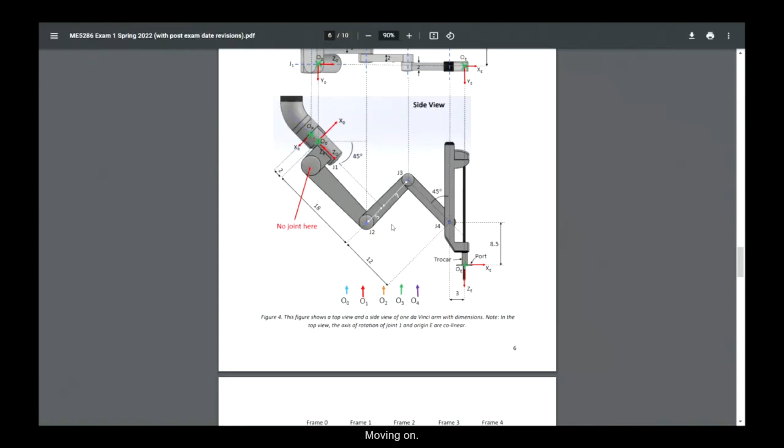Moving on. Like Professor Donath said, there was a bit of communication error, so we apologize for that. But like he also said, no one was punished with their grades for that. We made sure that if you showed understanding of how to place origins, how to do the DH table, and how to write your A matrices, that you didn't lose any extra points, and you're actually given points for our mistake.

So anyway, the main difference here, if you remember this figure from the exam, there were only 3 origins for you to place, O1, O2, and O3. In order to actually solve this problem correctly, you had to have an origin 4, which some students brought up during the exam. The reason we didn't include an origin 4 initially is because we're not considering a joint at the end effector, so really there shouldn't be a need for another origin. However, we need to get the z coordinate aligned with the z coordinate at the end effector, and the first solution with only 3 origins didn't have the z aligned. So really, to solve the problem the right way and get the right transformation matrix, we had to include another origin. That was the big mistake on our part.

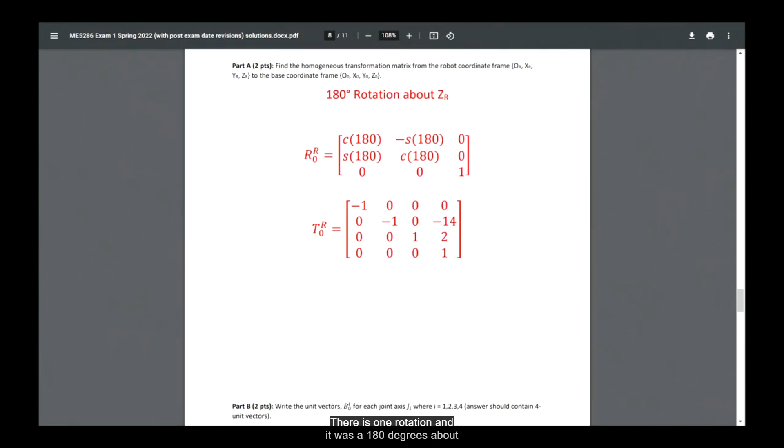So if we're going to switch to the solutions here for a second, there was one rotation, and it was 180 degrees about z sub r, my mistake. Using this view, we can see that zr and z sub 0 are pointing in the same direction, they're parallel. And to get that y sub r aligned with y sub 0, it's just a 180 degree rotation about z sub r. So pretty simple right-hand rule to figure that out.

That's where this 180 degree rotation comes from. And then this R matrix, this rotation matrix, is for rotations about z. So just plug in 180 degrees and you get the first 3 by 3.

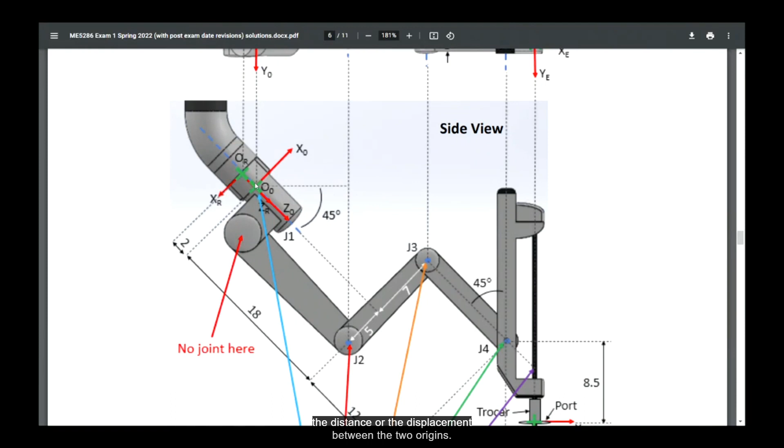And then the position vector. So we have a 0 degree or 0 translation from xr, negative 14 from yr, and 2 from z sub r. So again, going back to the diagram, we can see that if we zoom in here, that's a little blurry, but x sub r is normal to the distance or the displacement between the two origins, so there's no translation in x.

If we look at the top view, there's a 14-inch displacement between OR and O sub 0, but since Y sub R is pointing away from origin 0, it's a negative 14. And then lastly, if we go back to the side view, Z sub R is pointing directly towards O sub 0 along that joint, and this distance is 2, so the translation in Z sub R is positive 2. And that is where this position vector came from.

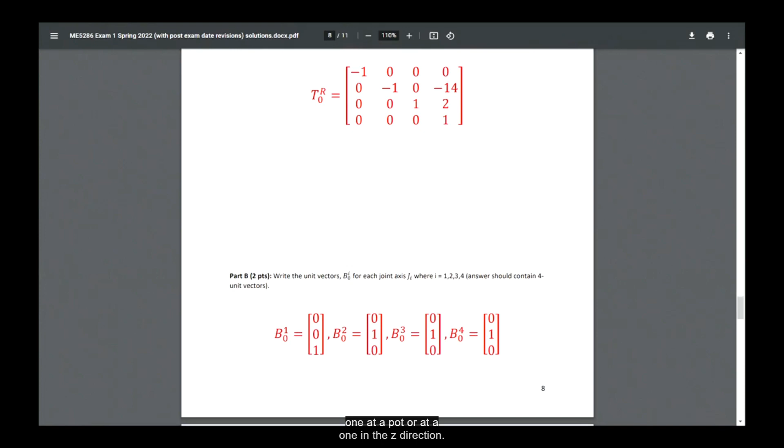Moving on, most people got part A and part B right. Part B was the unit vectors. This was pretty simple. The unit vector to joint 1 had a 1 in the z direction. We can see that from coordinate frame 0, z sub 0 is in the direction of joint 1, so z is positive 1 for that unit vector. Joints 2, 3, and 4 are all normal to the page, which is the y sub 0 direction, so all the unit vectors to joints 2, 3, and 4 are just positive 1 for y. Does that make sense?

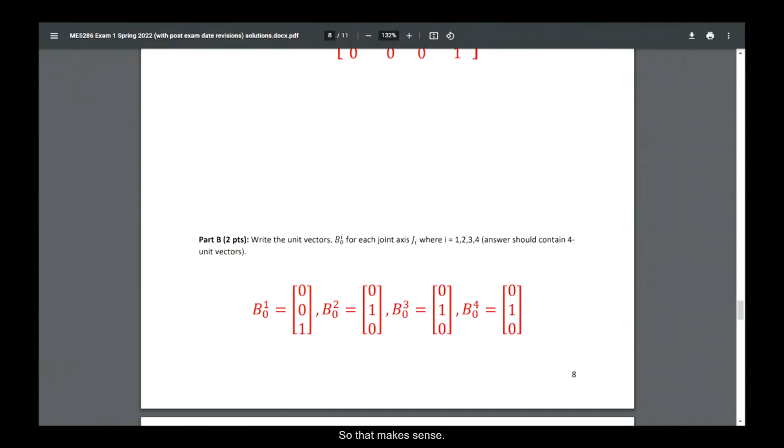Part C is where some of the confusion started for some students. This is where we have to place origins, and actually up through origin 3 it should have been pretty simple. So here's a solution. Origin 0 is already placed, just to give you guys a freebie there.

We know origin 1 had to fall along joint 2, the axis of rotation of joint 2. That's the first rule. In the side view, it has to be at this point because joint 2 is normal to the page. In the top view, origin 1 again falls along joint 2 and has to line up with origin 0, along this dashed horizontal line, which is where pretty much all the origins fell.

Origin 2 and origin 3 are the same story as origin 1. They fall on joints that are normal to the page, so in the side view they're right on the joint axis, and in the top view they all have to line up with each other. So O3, O2, O1 all lie on this dashed line. For the exam you took, that's as far as you have to go for placing origins.

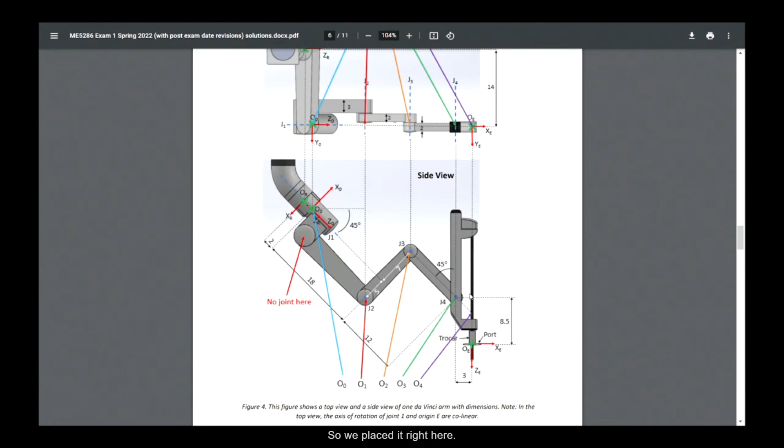But in order to get the true correct answer, we added an origin 4. In the top view, origin 4 had to line up with origin 3, somewhere on this dashed line. Then it had to be in line with the z direction, which has to match the z direction of origin E, so it has to be along this vertical line representing the instrument shaft. So we placed it right here, which would place it right above the origin E on the top view as well.

Again, you did not have to do that on the exam. If you tried placing an origin 4, you were given full points. As long as you got through origin 3 correctly, you were given full points.

The other part of this question was finding the coordinate frames. You were given coordinate frame 0 and coordinate frame R, so we'll start with coordinate frame 1. We know that z sub 1 has to fall along the axis of rotation of joint 2, because origin 1 is at joint 2. Since joint 2 is normal to the page, z1 is normal to the page. So these arrows are just going to be either x or y.

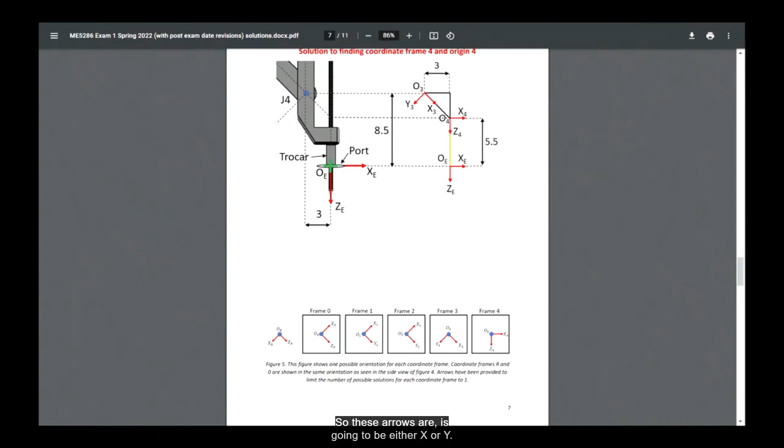y1 has to be parallel to joint 1 - that's another rule. In this view, joint 1 is at this 45-degree angle from the horizontal, which means y1 is also going to be in that same direction, which is where we get y1 here. Since we have z and y, we can just find x. That's how I solved that one. Any questions so far?

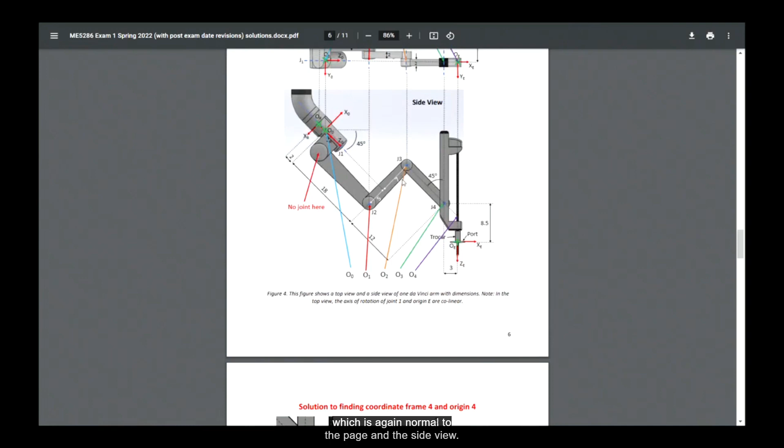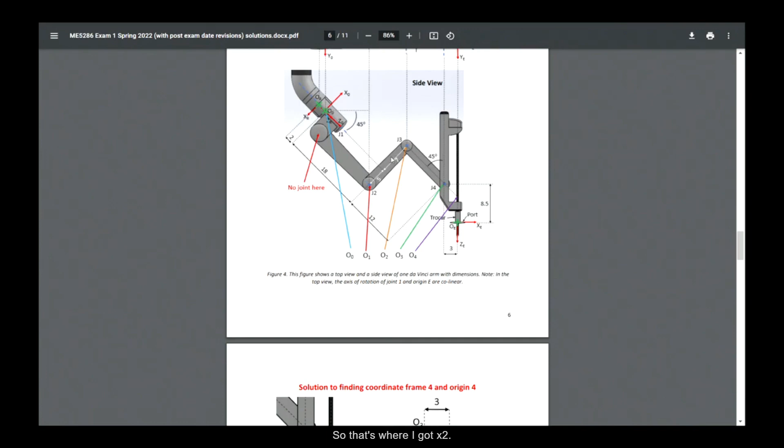For origin 2, it's pretty much the same thing. z2 has to fall along the axis of rotation of joint 3, which again is normal to the page in the side view. This is one of those situations where y2 can't be normal to j2 - I went over this in the review slides. One of the rules when this happens is that x2 has to be in a direction that connects the previous origin and the new origin. So origin 1 and origin 2, x2 has to be in some direction along this line - that's where I got x2. So in this situation, you solve for z and x first, and then place y based on those.

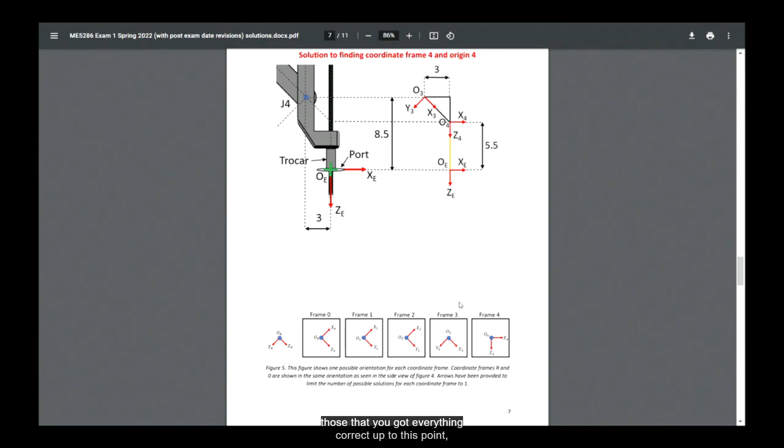For coordinate frame 3, we have origin 3 along joint 4's axis of rotation. This is a similar situation where x has to connect joint or origin 2 and origin 3. So if you can see my cursor, it has to fall along this dashed line, which is where x3 comes in. And since we know z3 is into or out of the page, we can use the right-hand rule to find y3. If you got all of those correct up to this point, you were given full credit for this question.

I'm just going to go through how Professor Donath and I solved for coordinate frame 4. This diagram is how we did it. I placed coordinate frame 3 here, offset so it's a little more clear. Coordinate frame 3 is placed at joint 4, and we know that the z direction of coordinate frame 4 is going to have to line up with the z direction of coordinate frame E. So we know that origin 4 has to fall along this vertical line to fall in line with origin E.

Based on that, let's see, we wanted this final translation between 4 and E to be just a D in the DH table. So X4 and XE line up as well. And then Y4 is just going to be, what would that be, out of the page. Same with Y sub E. Placing it here gave us the correct transformation matrix later on in the exam.

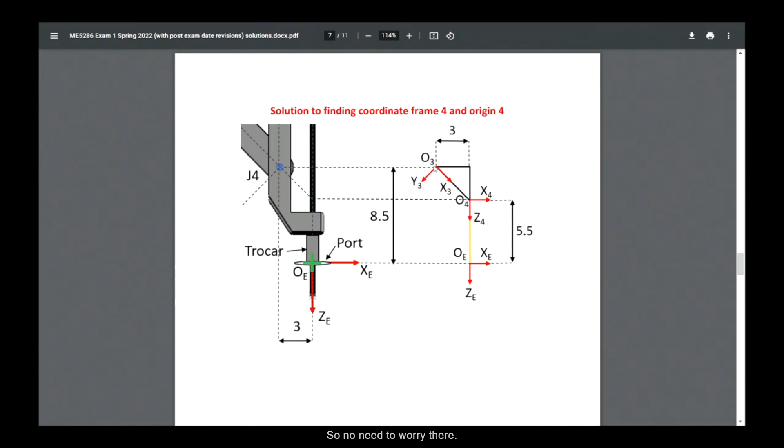All right, we'll continue on. So we're through part C. Part D was the DH table, and again, a lot of students had a different answer for joint 4, but if you showed you knew how to do the DH table through joint 3, you were given full credit. We added another row here, which obviously was not there in the exam, but you need this extra row because we added an origin 4.

Okay, so I will run through how we solved for the DH table. Joint 1, we start with theta 1, which is the rotation about z sub 0 to move from coordinate frame 0 to coordinate frame 1. There is no rotation about z. Let's go back. Again, moving from this coordinate frame 0 to coordinate frame 1, there was no rotation about z.

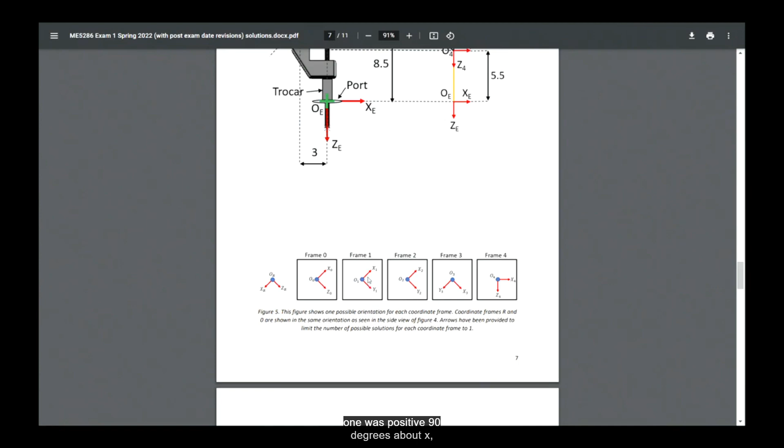We had a positive 90-degree rotation about x sub 0. So if you do the right-hand rule, that will get y sub 1 pointing down like it is here. So the only rotation for joint 1 was positive 90 degrees about x, which is the alpha value.

And then to find D and A, D sub 1 is the distance. The way I solve it is the distance in the y sub 1 direction from origin 0 to origin 1. Y sub 1 is pointing down and to the right. If we go back to the diagram with the dimensions, y sub 1 would be pointing down and to the right, and the distance in that direction from origin 0 to origin 1 is this positive 18.

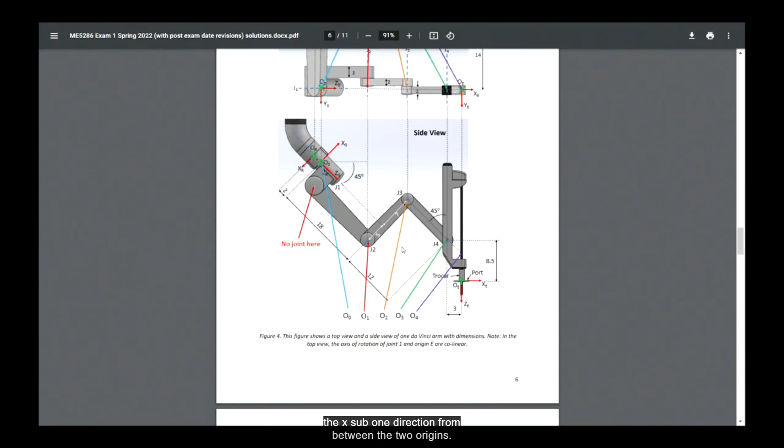And then a sub 1 is the distance in the x sub 1 direction between the two origins. If we go back to the coordinate frames, x sub 1 is pointing up and to the left, or up and to the right. This distance is 5. But since we're looking at moving from origin 0 to origin 1, this value is actually going to be negative 5 because x sub 1 is pointing back towards origin 0. So D and A are going to be positive 18 and then negative 5.

Anybody got questions on that? Okay.

For joint 2, theta sub 2 is the rotation about z sub 1 to get from origin 1 to origin 2. As you can see, the coordinate frames are set up the exact same. So there's not going to be a rotation about z or x. So theta and alpha are both 0.

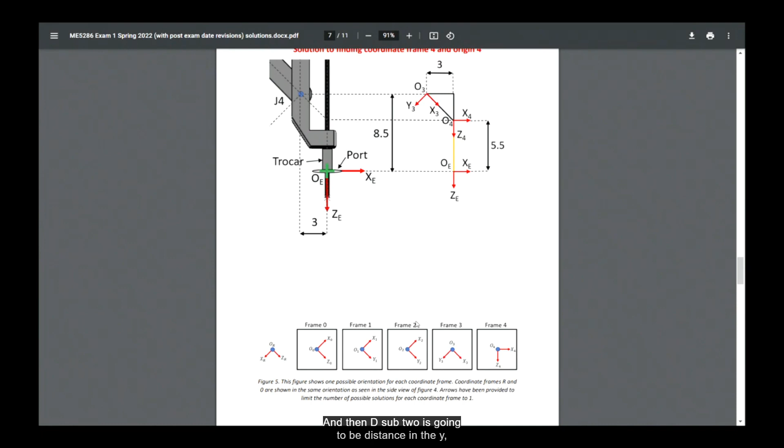And then d sub 2 is going to be the distance in the y2 direction from origin 1 to origin 2. If we go back to the solution, origin 1 is here, origin 2 is here, and y2 is pointing down and to the right. So there's actually no distance along y sub 2. That's why d2 is 0.

And the x2 is pointing up and to the right. Since a sub 2 is the distance in the x2 direction from origin 1 to origin 2, that's going to be positive 12. So it's 0, 0, 0, and 12.

For joint 3, theta is the rotation about z2. Z is into the page for both frame 2 and frame 3. Since frame 3 has a slightly different orientation than frame 2, but x and y are still in the plane, we know there's a rotation about z. A positive 90 degree counterclockwise rotation about z2 lines up x2 with x3 and y2 with y3. So theta 3 is 90, and there's no rotation about x, so alpha 3 is 0.

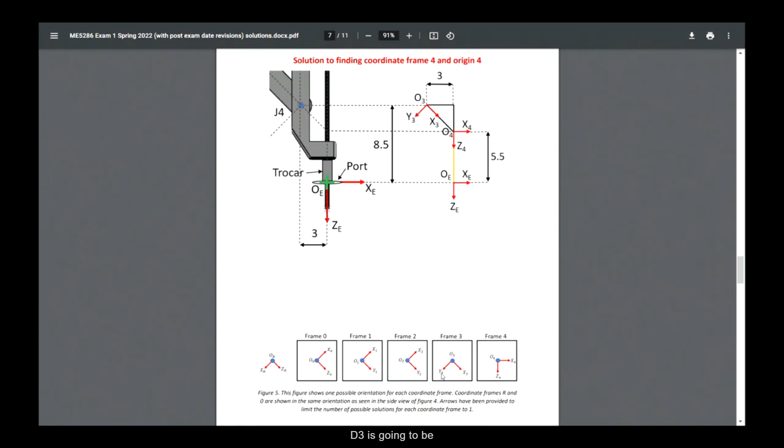D3 is the distance in the y3 direction from origin 2 to origin 3. Going back to the diagram, y sub 3 is pointing down and to the left, and that's normal to the displacement between origin 2 and origin 3. So D sub 3 is 0.

X sub 3 is pointing down and to the right, and A sub 3 is the distance in that direction from origin 2 to origin 3, which is a positive 12, as seen here. So we have a 90 degree rotation for theta, 0 for alpha, no d, and 12 inches for joint 3.

To reiterate, if you showed you knew how to do the DH table and got joints 1, 2, and 3 correct, you were given full points for joint 4, no matter what you put.

We're still going to solve for joint 4. The way we solve it: we have y sub 3, x sub 3, and then we need to get z sub 4 in the plane, so we know there's going to be a non-zero alpha.

The first step is solving for theta, which is the rotation about z sub 3, into the page here. The goal of this rotation is to get x sub 3 and x sub 4 parallel, so we have to rotate 45 degrees to get x sub 3 along the horizontal.

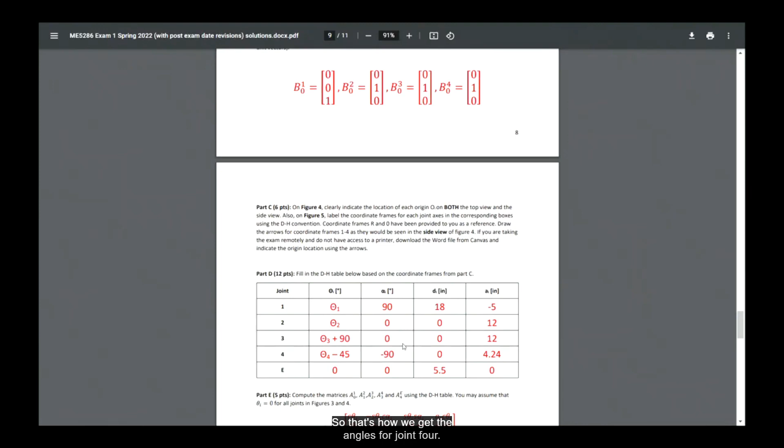For D4, there is no distance between origin 3 and origin 4 along y4, because y4 is now coming out of the page and they're collinear in the plane. So D4 is 0.

A4, since there's a 45 degree offset here, we're finding the hypotenuse of this triangle, and that's just 4.24 inches.

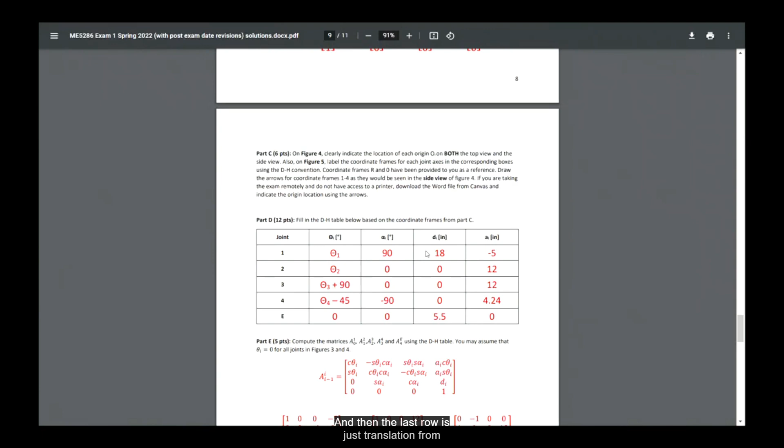The last row is just translation from joint 4 to joint E, or origin 4 to origin E. Since the coordinate frames are now lined up, there's just a 5.5 inch translation, and that's the D value. So that's how we solve the DH table.

Everyone's going to have a different answer for joint 4 most likely, because there was some confusion. But if you showed you knew how to do it from joints 1, 2, and 3, you were given the points for joint 4. We wanted to make sure no one was punished for our mistake.

This new exam, since there's another row of the DH table, we added a matrix to find. This is pretty simple, just plug and chug from the DH table.

There were a few examples where students got wrong answers in the DH table but still found the A matrices correctly based on their DH table values. You were given half credit for knowing the correct method, but you lost some points for having the wrong DH table.

Anyway, it's just plug and chug, no need to really go over how we got it. As long as you did the correct method, which is this matrix right here, you likely got full points.

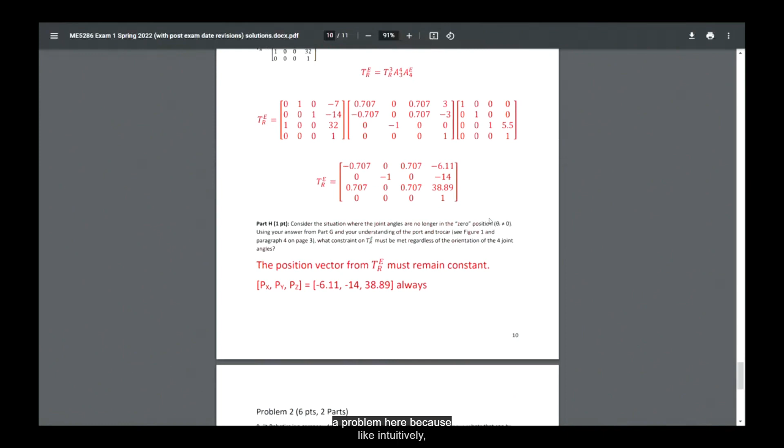One way to check—a few students actually brought this up during the exam—when they solved this transformation matrix, they got a y that was not negative 14. If we go back to the diagram on this top view, since all of these origins are in line, we know that the position vector, or the distance in y sub r to the end effector, has to be negative 14. So a few students brought that up, and that's what tipped me off that there might have been a problem here, because intuitively this has to be negative 14 just based on the schematic.

Obviously these x and y values are a little more difficult to solve since there's some geometry involved, but since there's a negative 14 here, that should tell us this is likely the correct transformation matrix. To reiterate, if you showed the correct multiplication sequence, you're awarded full credit for this part.

The last part of problem 1 tested your understanding of the robot, making sure you were reading about it in our description. So if we're considering a situation where the joint angles are non-zero, meaning this schematic looks different—let's say there could be joint 2, joint 3, and joint 4 at a different angle—the question is asking, what about this transformation matrix has to stay the same?

And the position vector cannot change. That's because, if you remember the robot, the trocar is where the end effector is, and that is stationary in the port, which is essentially the incision in the patient. We're considering that like a spherical joint about the port, so it can twist all sorts of ways, but it cannot translate anywhere, because in a surgery that would rip the patient's skin or do some sort of damage.

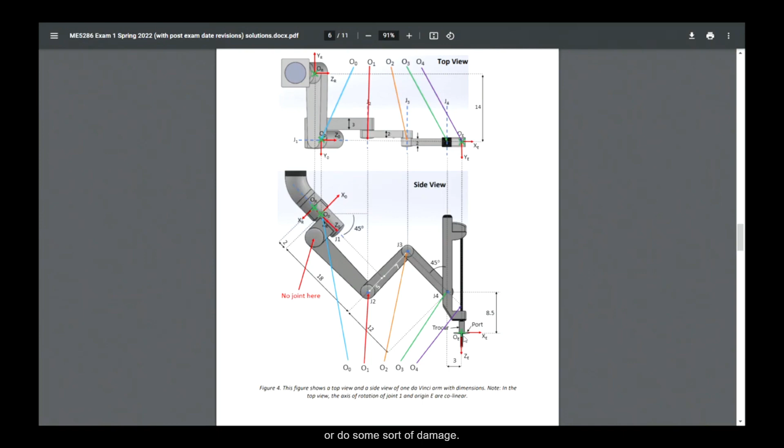So we were looking for something about the position vector. There were a lot of students that said the Z had to stay the same. If you were one of those students, you were given partial credit, but really the entire vector itself can't change no matter what joint angles you have. Is that clear?

So if we didn't have the negative 6.11 or whatever, it's fine as long as we said it was like px, py—yeah, you got full points for that. If you said position vector, if you said px, py, pz, if you put your values but they didn't match up with what I had, it didn't matter. You still got full points.

Well, matrix multiplication for part G—if you had the right sequence, you got full points. If you did a coordinate frame wrong, it cost you a little bit. You still got some credit for doing the correct method, as in the DH table and the A matrices. Does that make sense? Yeah.

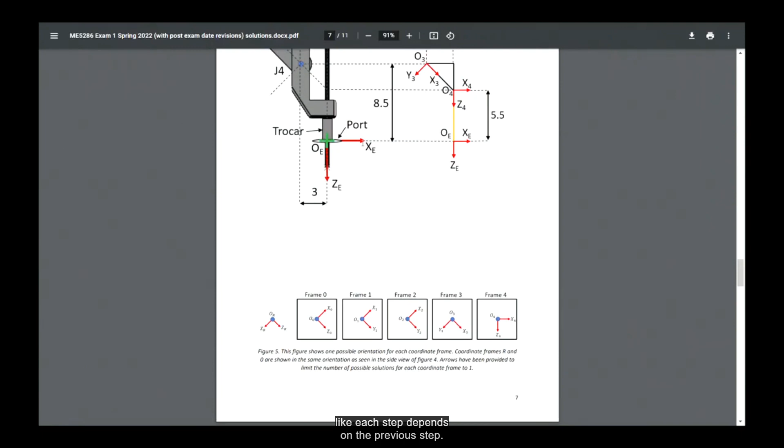Okay, so I get that this is kind of step-by-step, each step depends on the previous step. So if you placed origins wrong, that's going to affect everything. If you do wrong coordinate frames, it's going to affect things. But we tried giving partial credit for your method. Make sense? Yeah. And if you go through your exam and you have an issue with it, just let me know, and I'll try and work that out.

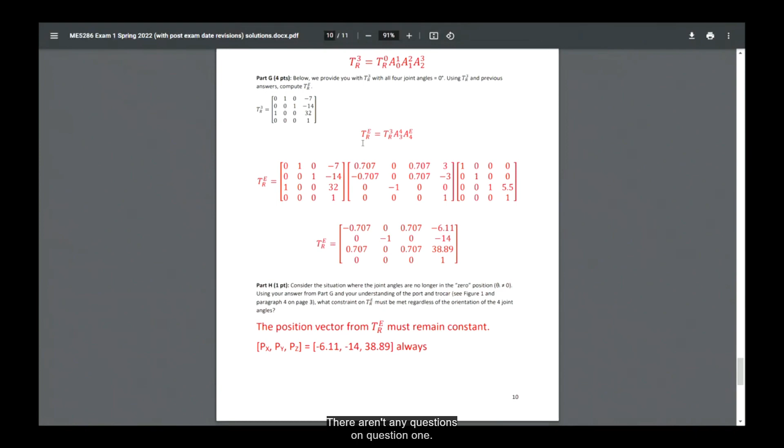If there aren't any questions on question 1, we'll move on to problem 2. This was just roll, pitch, yaw, multiple conventions. There were a bunch of right answers I saw for part A. Most people got this question completely right. I just listed 3 solutions I saw in the exam that gave the right orientation of the coordinate frame 4 here.

For part B, there are 2 possible situations given here. Some students did an XYZ rotation, and some did a ZYX rotation, both of which were fine and correct. I just listed 2 ZYX rotations here that are correct.

Anyone have any questions about the roll, pitch, yaw? It seems like the class was pretty clear on this concept, which is good to see.

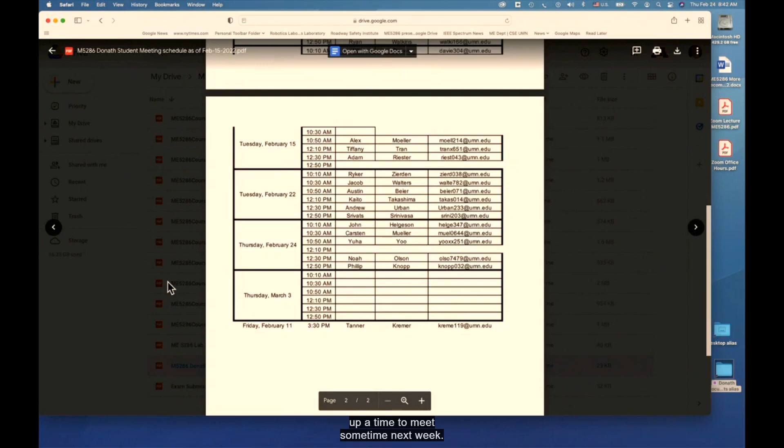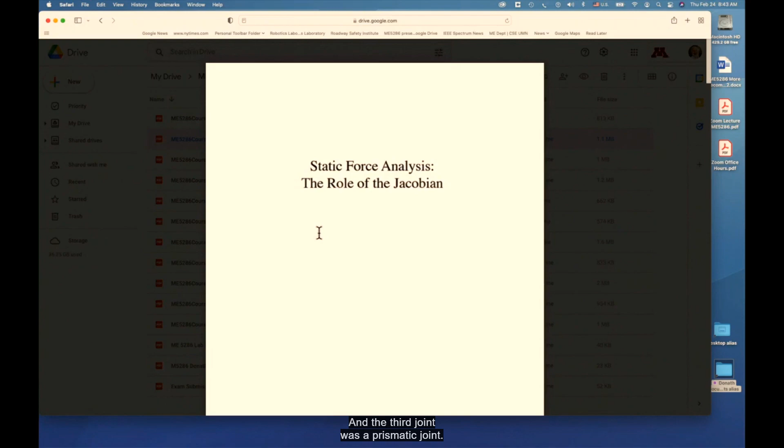Last week we talked about computing the Jacobian. I went through this in great detail on a 3-jointed machine, where the first 2 joints were revolutes and the 3rd joint was a prismatic joint. We went through the analysis, all the vectors, unit vectors, and cross products, in order to get the final result, which was a 6x3 Jacobian.

So the question always is, is that the only application of the Jacobian? Jacobians have an application that essentially leads to the capability of calculating 2 things. Either you know what the joint velocities are, and then you can compute what the final velocity of the end effector is - think of that as not that different from the forward kinematic solutions, but it's what we'd call the differential form.

The other option is to do the inverse kinematics. What happens if I have a specified velocity at the end effector, and I want to calculate what the joint velocities need to be? To do that, you have to look at the inverse of the Jacobian. But there are other applications, and the other application we're going to talk about is looking at the forces.

What I mean by that is if I have a robot, and now we're talking about a robot that makes contact with the world - I'm doing stuff, I've got a pen, and I'm actually making contact with the world, there's going to be forces that push back. There are reaction forces over here. What is the propagation of these reaction forces to the individual joints?

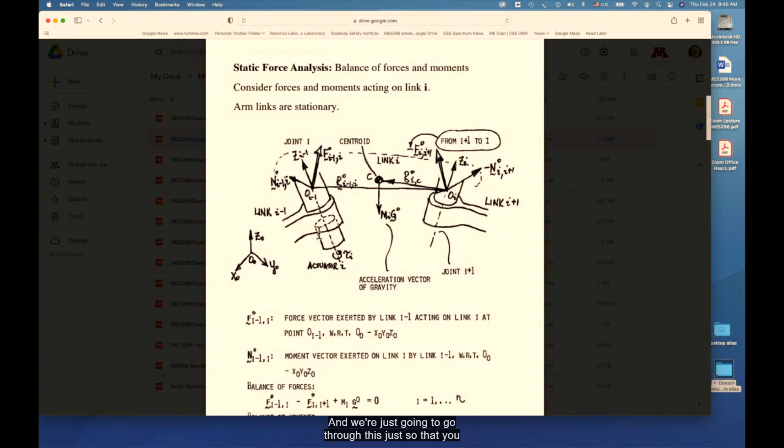So what I'm going to first do is show you the complicated way of doing this. We're just going to go through this so you understand the actual complications if you had to actually solve for everything you need to. I'm doing this so you get the big picture, and then I'm going to show you there is a very simple, straightforward way of doing the analysis and figuring out the relationship.

Don't get frightened by what you see here, but I just want you to see what all the components are if you were really going to do a sum of forces, sum of moments, and calculate all the reactions. So if I have an actuator - here's an actuator, think of this maybe as a motor that's applying a torque, and it's applying a torque to joint I. Remember, when we're talking about joint I, it's about z sub I minus 1.

So there's z sub I minus 1, and then we have this link I, which I'm not drawing, because if I drew the link it would cover up all the vectors I'm showing you. Just assume there's a link I that connects this joint with the next joint. If this is z sub I minus 1, the next one is z sub I, and this link over here is link I plus 1. So here we have link I minus 1, here's link I, and here's link I plus 1. This is joint I, and this is basically joint I plus 1.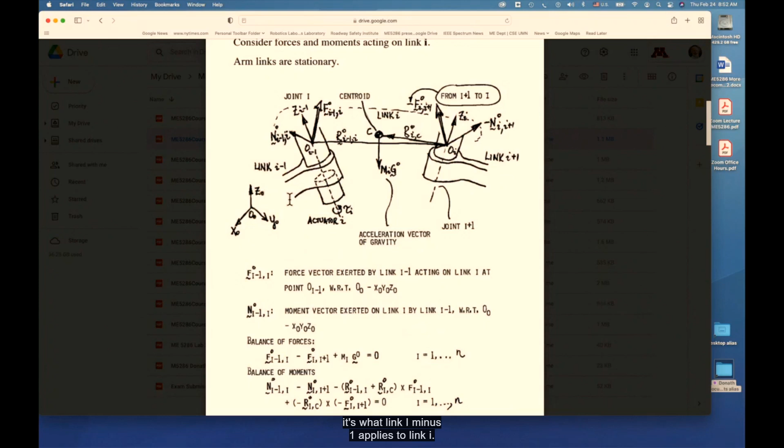So these are the forces: a component in X, a component in Y, and a component in Z. And there are also going to be moments. As soon as we start dealing with moments, that moment vector also has 3 components. In this particular case, it's what link I minus 1 applies to link I. So these are the terms here, N, and again, this is a 3 by 1, and this is a 3 by 1.

If we do a balance of forces and a balance of moments—take all the forces in the X direction, all the forces in Y, and all in Z, and add them up—we end up with this equation. Let me move this up a bit so you can see these other vectors. Essentially, the reaction forces are the forces applied here, the forces over here, and there is the gravitational force.

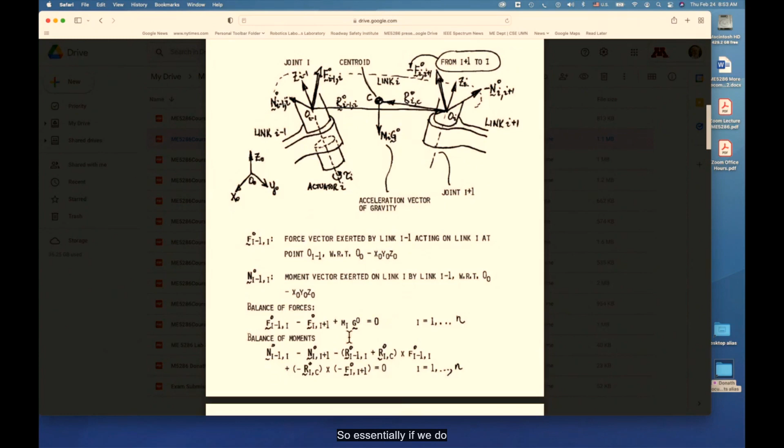So in effect, this is the first equation. Remember, there's no dynamics—we're talking about static conditions, so there's no motion going on. So if we do free body diagrams and sum the forces, we're going to get this equation.

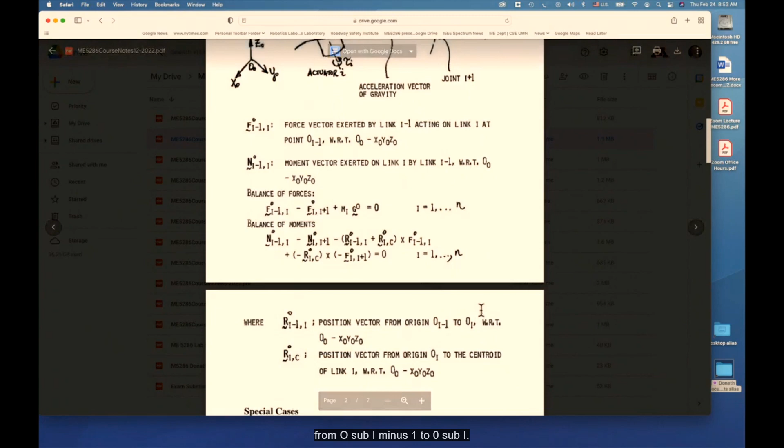If we then do the sum of the moments, there are moments here and here, but we cannot forget that there are also position vectors which take us from the origin up here. This vector r sub I minus 1, I, connects O sub I minus 1 to O sub I. So this is the position vector from O sub I minus 1 to O sub I, from here to here. That isn't a big deal to determine for any particular robot.

But there is also this other position vector which takes us from origin I over here to the centroid itself. Again, that's a position vector, and it plays a role because this is pretty straightforward.

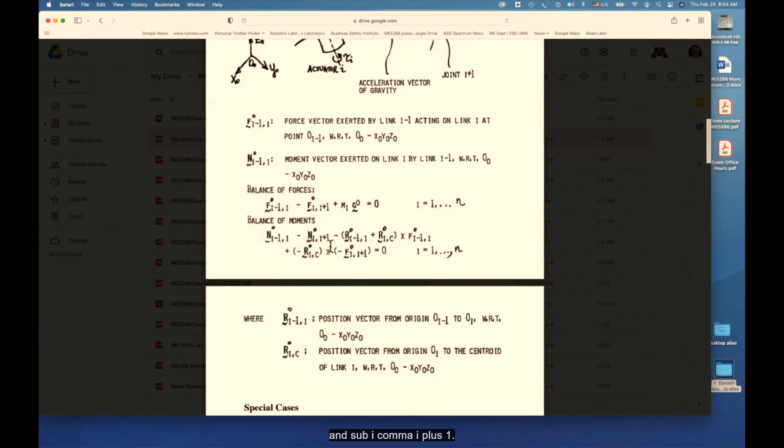You take n sub I minus 1, comma I, subtract off n sub I, comma I plus 1, but then you also need the fact that when you take this vector and this vector and add the two, you basically get a vector from O sub I minus 1 to this position, to the position of the centroid. That's what this is basically saying.

You have to do the cross product of that vector with essentially the f sub I minus 1, which is this one here. Remember, we're taking the sum of moments about the centroid. So essentially, you have the vector that connects this point to this point, and you have to take into account the cross product between that and the force. That's what this term over here is. That gives us another moment that's applied here.

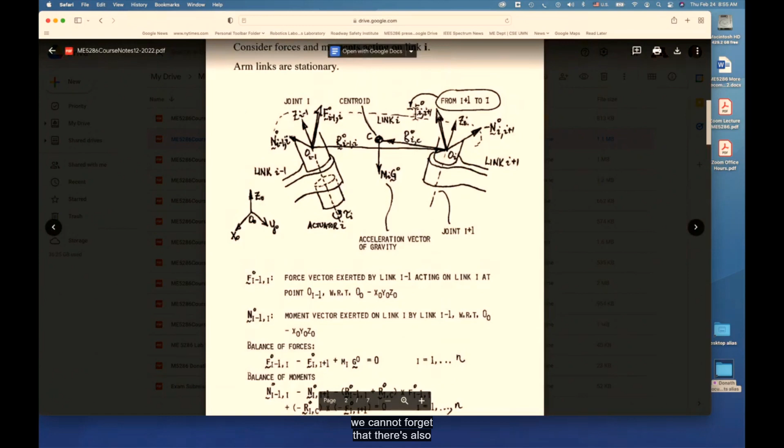And last but not least, to get a total balance, we cannot forget that there's also this force vector over here acting on here. Essentially, this force is what link I plus 1 is applying to link I. Notice the minus sign, because it's applying reaction forces on link I. We can't ignore it, so it shows up here, and it is basically a cross product as well. We have to take all this together.

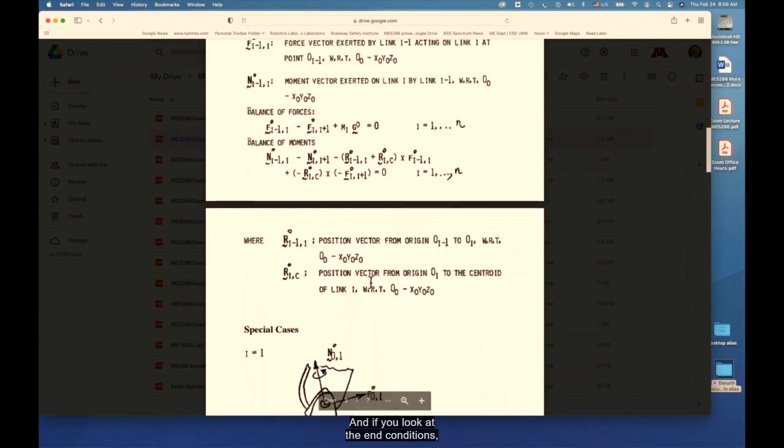And if you look at the end conditions, the base of the robot, there are going to be some forces and torques, reaction forces at the base of the robot. You might put it on an instrumented platform and then measure those, for example.

And then you have the end effector, which may be holding something. This might be a contact probe that you're pushing into the wall, for example, or it might be a piece of chalk scratching across a blackboard. It's doing some activity where you're interacting with the world, and so there's going to be a force and torque applied by the outside world back on the robot itself.

We're going to take a look at some examples later on. I'll take you to some websites, but there are companies whose mission is to control exactly what the forces and torques are as you apply to a surface. Typically, grinding is such an application. There is robot-controlled grinding of surfaces, polishing of surfaces. There are many activities where you actually have to apply forces in a controlled manner to a surface.

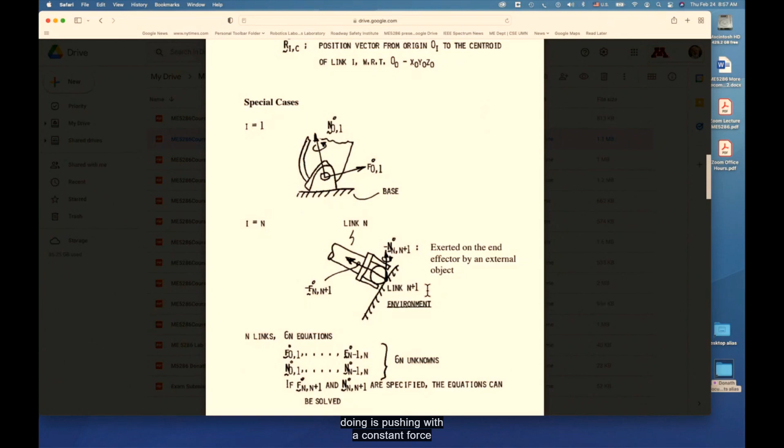And what you might be doing is pushing with a constant force against the surface here and not applying any force in that direction, again depending upon what the objective is with your tool.

Well, if we take all of this together, take all these equations, spell everything out and write it out, we're going to get an unbelievable amount of equations. Because remember, if we just look at the forces, if there are n joints, we're going to end up with 3n unknowns just from the forces, and then we add the moments, we get another 3n unknowns. Together, we have 6 times the number of joint unknowns that we're trying to solve.

And it can be solved, but it's a very tedious process. You just don't want to bother to do all that, because remember, some simple things like how do you determine exactly where the centroid is inside each link? That's an awfully tedious task to do, and I'm not proposing that we do it.

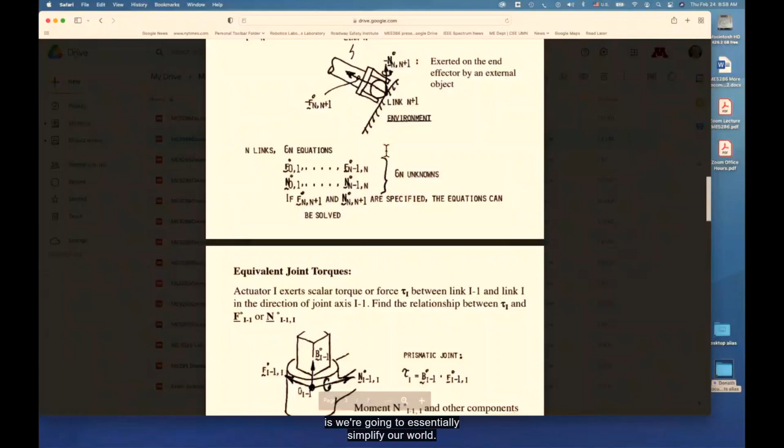So what we're going to look at is simplifying our world, remembering that we have real bearings, we have structures that are designed to limit all these cross-structural effects. And so we're going to find that there's a much simplified way of relating the torques or forces at the joints with the forces and torques at the end effector.

So let's go through this and take a look at a prismatic joint and a revolute joint. This is going to be what you might call a generic joint. When I say a generic joint, assume for a moment that at that joint we're going to have an actuator of some kind, and that actuator might be a prismatic actuator, a hydraulic cylinder that's moving in and out, or it might be a rotational motor. We're going to assume now that there are bearings and structural elements that allow you to ignore all the other reactions that may be applied to that structural joint.

So if we take a look at the relationship, here's a prismatic joint that can only move up and down, okay?

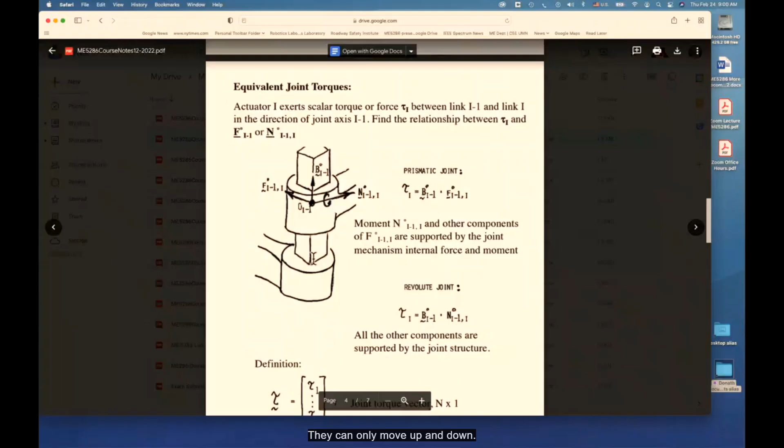We're assuming that you've designed the structure so that any torques applied in other directions are captured by bearings or thrust bearings that take care of those. If we have a unit vector defined along that joint, and the origin of that coordinate frame system, in order to keep this as generic as possible, I'm using tau, but tau can represent either a force or a torque at joint i.

For a prismatic joint, tau sub i is going to be 3 forces: F sub x, F sub y, F sub z. These are forces in directions where B sub i minus 1 is essentially the unit vector along which the prismatic joint is operating. So in effect, this is the force vector that the actuator has to apply to overcome the reaction force vector at this particular joint.

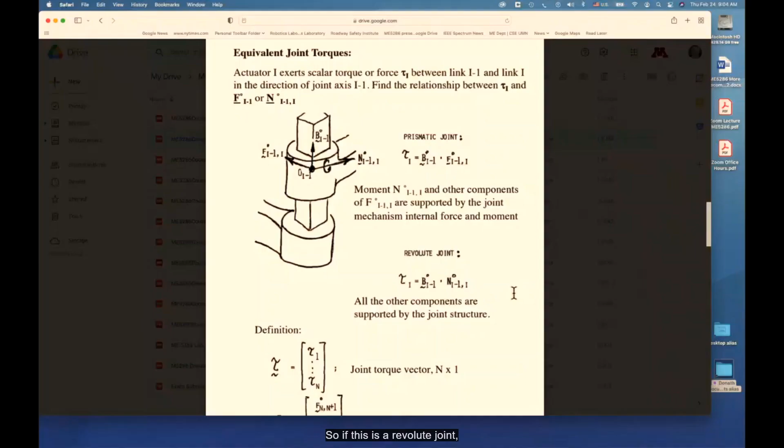So if this is a revolute joint, look at the similarity between this expression and this expression. If it's a revolute joint, dealing with this over here, the reaction tau sub i in this case is a set of 3 moments, and that is essentially what is being applied by my actuator — let's say it's a motor.

If everything is designed properly with your transmissions and everything else, along which axis should that motor be pointing? If we're going to rotate, this is a rotational joint, and b sub i minus 1 is now the normal unit vector telling us which axis we're rotating about. Then the torque applied by that motor, by that actuator, is going to essentially be the dot product of whatever set of moments are acting at that joint.

It's going to be dotted, so to speak, with the unit vector. So in effect, this revolute joint — the motor, the actuator, and the transmission, whatever is being applied at that particular joint — its mission is basically to handle the components of the reaction moments applied at the joint, via the dot product, which gives the components of that moment acting about that particular unit vector. If there are moments not in the right direction as far as the motor is concerned, it does not see them, because the structural elements of the robot, the bearings designed into that robot, pass those down to the ground and are never seen or felt by the motor.

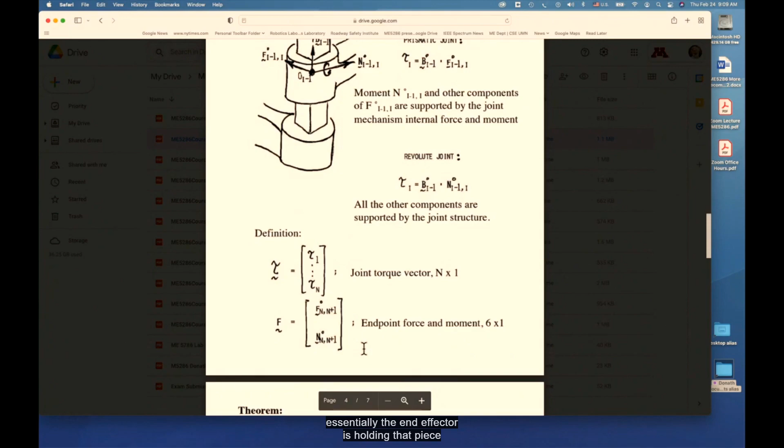By the same token, the endpoint force and moment, this has to be 6. So there's going to be 3 forces here and 3 torques, and that's at the endpoint, where essentially the end effector is holding that piece of chalk and working its way across the chalkboard. Those are the reaction forces that are measured either in a load cell at the end effector or measured by a load cell on the blackboard or some other surface.

So that's the endpoint force and moment. And the whole idea here is to relate these two. How are they related to one another? Can we calculate what those forces and torque reactions are inside the joints, which you need to worry about, because when you size a motor, you don't just size it for dynamics, you need to also size it for static conditions. You need to include both in making any decisions about how big a motor to use to drive a particular machine.

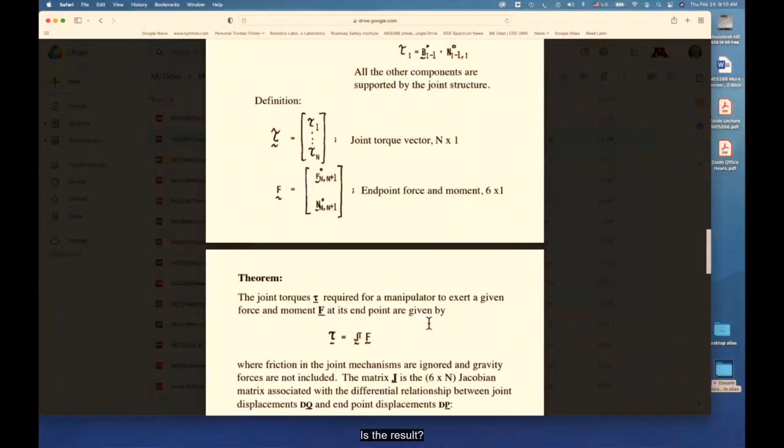So what we're going to look at is the result, and then I'm going to show you how to get this result, that in effect there is a relationship between those sets of torques. Remember, it could be a force too, but essentially if we're talking about a set of joint torques tau, what we're going to show is it's related to the set of endpoint forces, F, by the transpose of the Jacobian. That's a pretty awesome result that makes it very easy. Once you have the Jacobian, calculating the transpose is fairly straightforward. There's no craziness of having to calculate an inverse of a Jacobian. So this is a fairly straightforward analysis.

And this assumes the definition of a Jacobian, which is basically a matrix that relates the set of small differential changes at the end effector, d sub p. Remember, d sub p has 6 components, small changes in x, y, and z at the end effector, and 3 small rotations about x, y, and z. And dq are the small changes at the joints. If we're dealing with 6 joints, there are going to be 6 of these small changes in joints. So what J does, the Jacobian, is relate small displacements at the end effector with small displacements in each of the joints. So how do we get that?

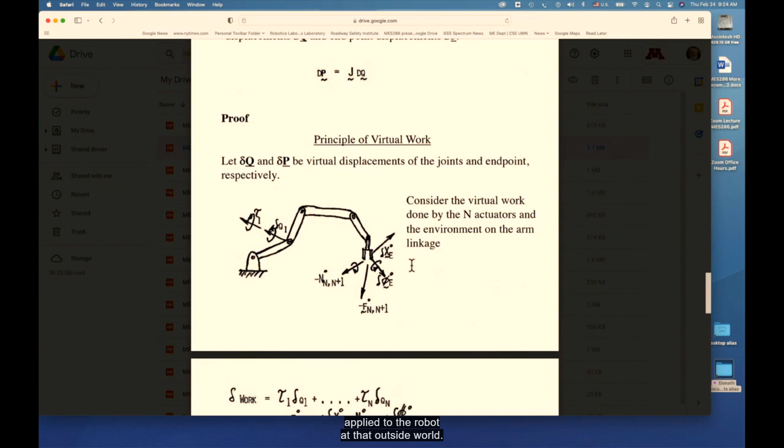So if we now add up all the work going on, at the first joint we're going to have tau 1 times del q1. This is a force or a torque multiplied by a small translation if it's a prismatic joint, or a small rotation. So force times displacement, as I said, is energy or work.

And then we're going to add up the next joint and the next joint and the next joint. At the nth joint, we're going to have the nth actuator apply a force or torque multiplied by the small displacement at that end joint. That's all the energy going into the system, all the work going into the system.

And then some work is to balance all this. We're basically going to say that at the end point, we're going to have a force vector, which is basically the reaction. It's being taken out of the system, so to speak. So this is the force coming out of the system or being absorbed on the outside world, the reaction forces, times del xe. So that's the energy going out.

So these are energies coming in. This is energy going out. And this is work going out. So this is the moment times those small displacements.

We can then combine all this if we take the transpose of a torque vector. Remember, tau is a vector n by 1. And we're going to multiply it by another vector, but this is going to basically be, we take the transpose of a vector that is a column, then becomes a row. The transpose of a column becomes a row. So tau transpose is essentially a row vector multiplied by a column vector. So this is essentially a product.

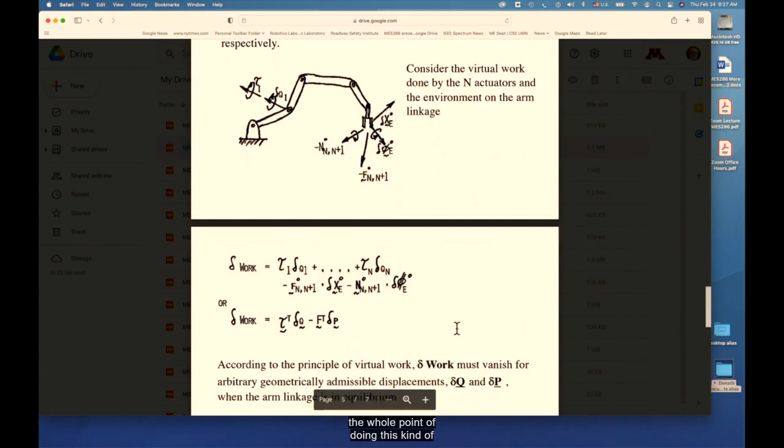Now, the whole point of doing this kind of analysis is if we're talking about any particular geometry, essentially we're talking about really tiny displacements of del q and del p. We're basically going to say there's no real work being done by the system. This del work is equal to 0. Nothing's moving. There really isn't any displacement to speak of in the big picture. Essentially, the robot is making contact with the wall, and then I'm pushing against the wall. There's no work going on.

Now, you might say, I as a human, if I'm doing push-ups, clearly we're doing some work. But just not doing anything and just pushing against the wall, your muscles are actually contracting. There is real work going on inside your muscles, even if you don't see anything of your arm moving along. But the bottom line is, in this analysis, del work is equal to 0.

And when we do that, we are going to see that there's a very neat relationship that comes out of this. If the geometrical constraint is simply del P is equal to the Jacobian times del Q, remember what that means. The Jacobian, by definition, relates small changes at the end effector. Small displacement changes at the end effector are related to small changes at the joints. So del Q is essentially a vector of small displacements at each joint. Del P are small displacements at the end effector.

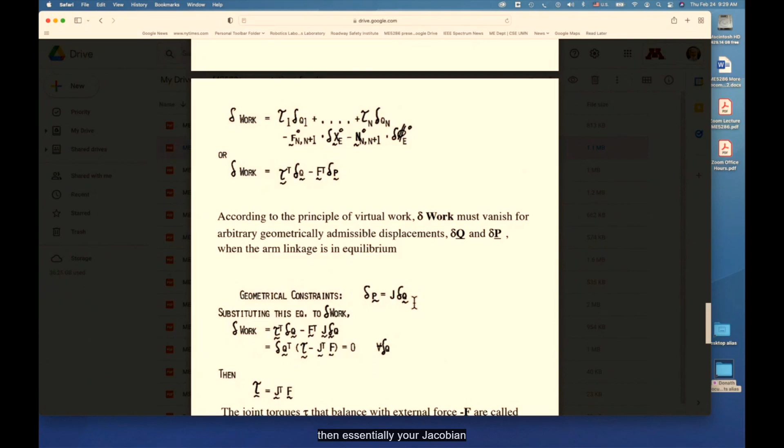If del Q is only 3 elements, then essentially your Jacobian is going to be 6x3. So if we have this geometrical constraint, which is essentially the definition of a Jacobian, then we can do some plugging in. Here is this del work.

I'm just going to take this equation, and now I'm going to substitute into this equation for del P. You see this del P over here that my arrow is pointing to? I'm going to replace del P by J del Q.

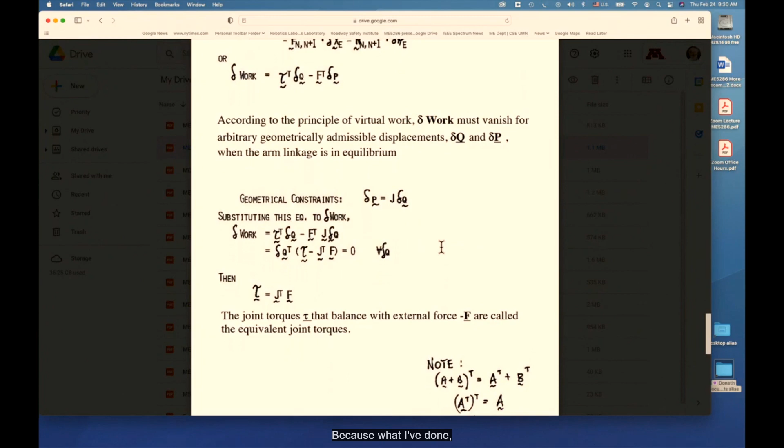And when I do that, I get this equation over here: tau transpose times del Q minus F transpose times J times del Q. I get this result. And now I can play with my transposes a little bit, because what I've done is pulled out some equations for transposes.

If you take the transpose of the sum of two matrices, it's the same as adding up the transposes. If you take the transpose of a transpose, it's the original matrix by itself. And if you take the transpose of a product AB, it's equivalent to reordering B and A, the same as taking the transpose of B times the transpose of A.

This is important because it applies to this analysis, since we've essentially moved del Q to this side. We had to transpose and move it around, taking into account this result. Then we take the transpose of the difference, and again taking this into account, we get this result. So the bottom line is we get this equation.

We're saying delta work is equal to 0. Well, then if del work has to be equal to 0, and this del Q has to exist, be admissible as they say, that means this expression has to be equal to 0. That means tau minus J transpose F has to be equal to 0, and if that's the case, tau is equal to the transpose of the Jacobian times F.

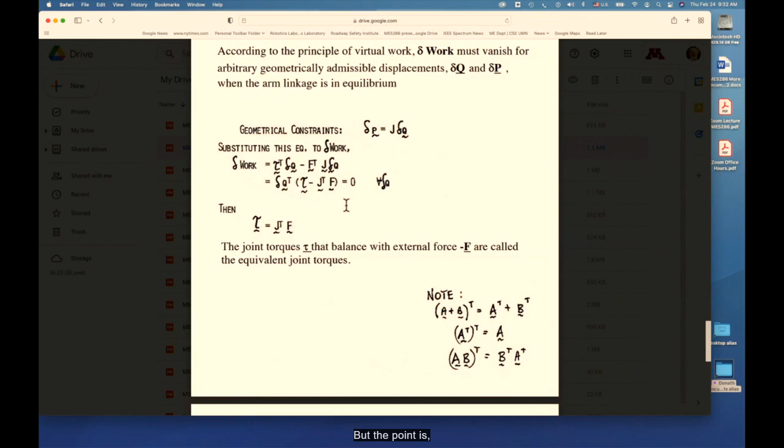But the point is, what's important is to realize that if I have some forces and torques at the end effector, when that end effector is touching the world, touching the wall, touching the table, and doing stuff, there is a static component to all that.

And we can calculate, for static conditions, the reaction forces at the joints as a set of vectors tau. For 5 joints, tau is going to be 5 by 1. For 6 joints, it'll be 6 by 1. And F is always going to be 6 by 1 — there are 3 forces and 3 torques.

And essentially, to figure out what these reaction joint torques have to be, what the motor has to overcome under static conditions, we basically multiply the transpose of the Jacobian times F.

Now, just looking at that and trying to understand this a little bit, what you need to remember is that the Jacobian changes its value depending upon where you are in the workspace. So the Jacobian is always a function of the joint variables.

And because it's a function of joint variables, that's telling you the reaction torques at each joint are going to be different if I'm pushing at the wall here, or pushing at the wall there, or pushing down on the table, because we're going to have a different set of joint values in the same work volume. The origin of my robot is over here.

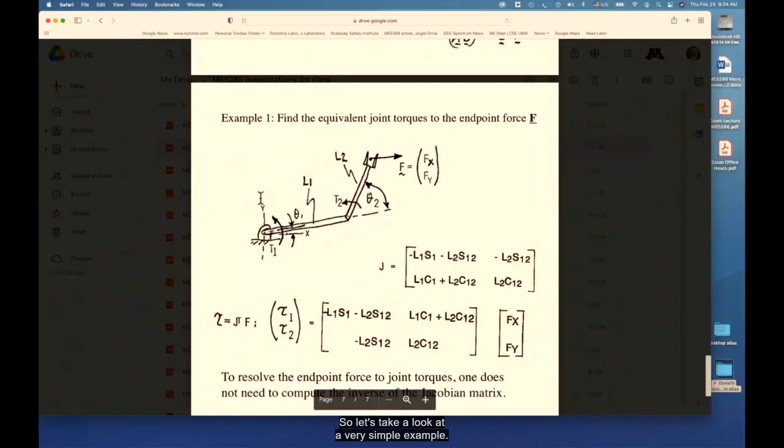So let's take a look at a very simple example that we've looked at before. This is essentially a two-link planar robot, only moving in the plane. Here's theta 1, there's theta 2. There's a torque applied at the first joint, a torque applied at the second joint.

At the end point, before we looked at it being two components, velocity along x, velocity along y. Now we're saying if there is an fx and an fy, if we measure the force in the x direction and the force in the y direction that this robot applies to a surface, can we calculate what the two torques are for a particular set of theta 1 and theta 2?

So we previously went through and I showed you the Jacobian of this two-link thing. By the way, it's in your textbook - if you go back, I give you the exact problem numbers in all three editions of the book. This is what the Jacobian looks like.

Remember, S sub 1,2 is the sine of joint angle 1 and joint angle 2. If this is the Jacobian, the transpose of a Jacobian - remember the diagonals stay exactly the same, we just swap the off-diagonal terms for a 2 by 2. Very simple transpose. So if we take the transpose of this, we get this matrix.

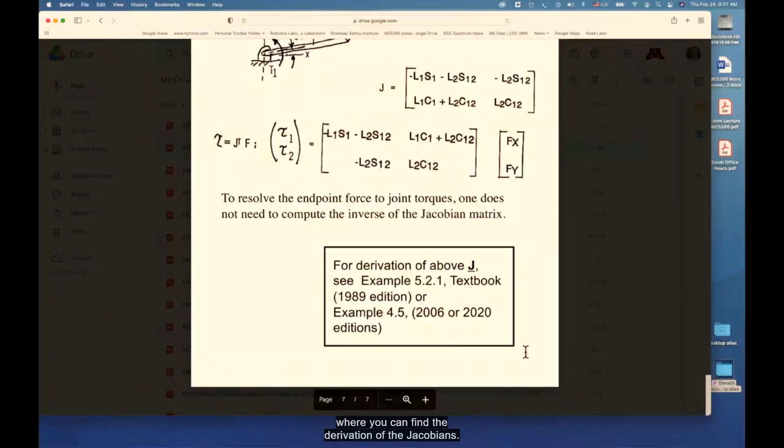OK, so let's now do another example. This is example 1, and we're going to take a look at example 2. We're going to look at more complicated worlds - specifically a force torque sensor and a much more complicated geometric relationship.

This defines the relationship between the small variables in P, which are the end effector displacements - this is a 6 by 1, with 3 small translations and 3 small rotations at the end point. It's related to small displacements at the joints, and the size of this vector is a function of how many joints there are. Then there's the Jacobian that relates del P with del Q - that's the famous Jacobian.

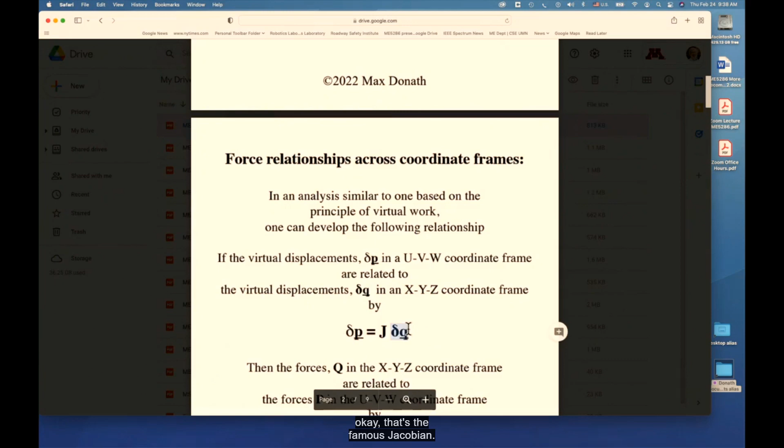What we're going to take a look at is an example where we have a load cell, a force-torque sensor, and we're going to use the forces. We'll look at the Jacobian and see how we can use it to relate the forces and torques in the load cell, which may be sitting in the wrist of the robot, just like it is on the UR5s you're using in the lab. We're going to see the relationship between the forces and torques at the tool end and what we can measure inside the load cell. So let's take a look at this example.

In order to understand this better, I actually brought a load cell here, and I am going to pass it around. This is a very old load cell, one of the first that was actually put together - my guess is the early 80s. Actually, if I remember correctly, the property ID tells me I got it in 1983, so it's pretty old.

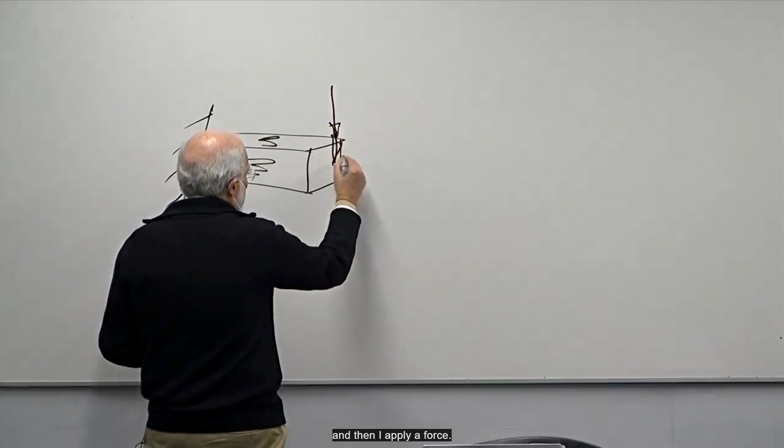How many of you have touched strain gauges? You all know about strain gauges and beams - if I have a beam with a square cross section, just a beam with a force at the end, and I put load cell or strain gauges on all four sides, I can relate... if I put a strain gauge here and there on all four sides, and then apply a force, I can essentially resolve the components using these load cells, Wheatstone bridge, differential amplifier.

I don't want to get into all the details - I'm assuming you've picked that up somewhere. But one way to actually get all the forces and torques is essentially, now here you're going to have to bear with me.

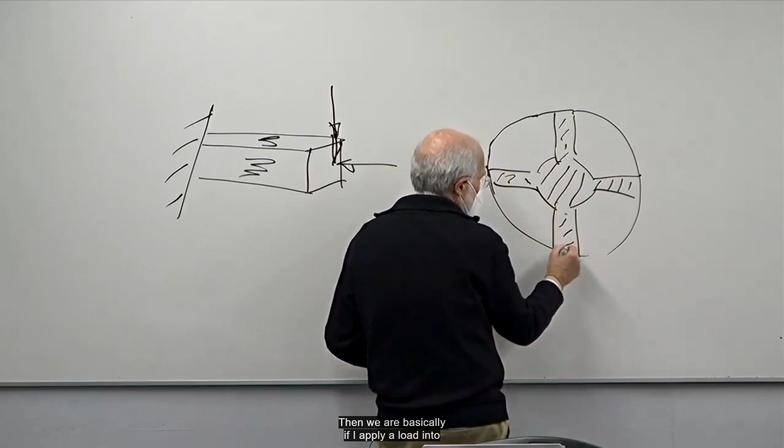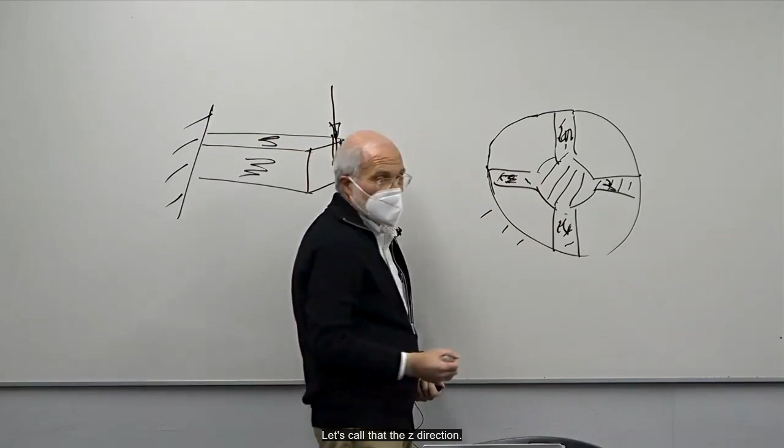Let's say I have 4 beams that are going to connect to this piece over here. We apply a load into the screen, and everything on the outside is rigid. I put sensors on all 4 sides of what might be called a Maltese cross design. If I press down, let's call that the Z direction, I can calculate the forces by taking into account what's going on all 4 sides.

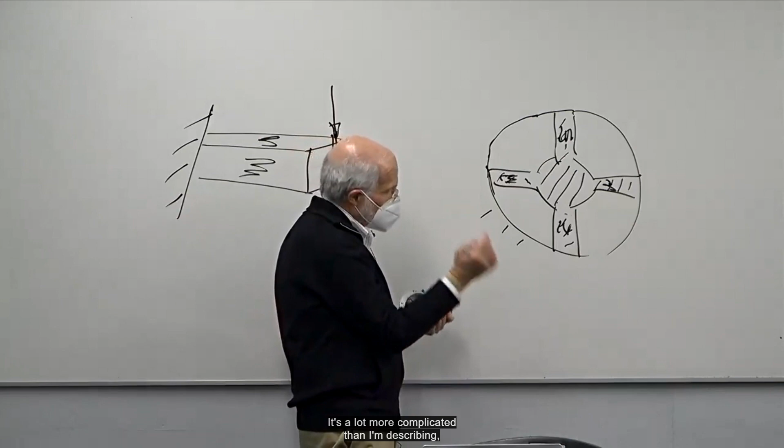If I put a torque in this direction applied to here, this will bend a little this way, this will bend, this will bend, this will bend, and I can resolve what that torque is. It's a lot more complicated than I'm describing, but by putting strain gauges and designing them appropriately, I can essentially resolve Fx, Fy, Fz, and 3 torques applied to this unit.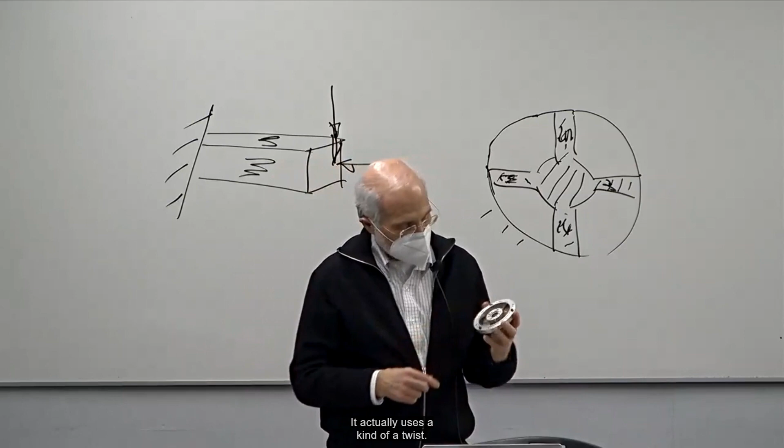What you see here is an early version of a load cell, but it doesn't use the cross design. It actually uses a kind of a twisted setup. I'll pass this around so you can see what's going on.

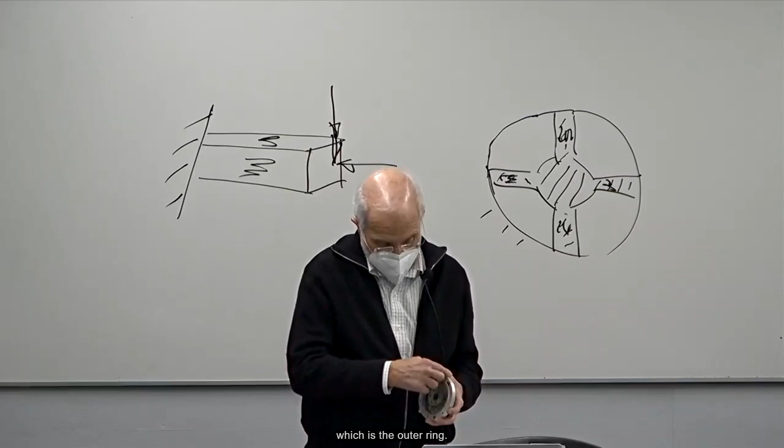The forces that are measured aren't really forces, they're displacements, very small displacements measured by the strain gauge, which gives you a measure of the displacement. Because these are rigid metals - this one's aluminum - you can get a relationship between force and delta x depending on the stiffness of the material. So what this is doing is relating the forces and torques on the central core with the base, which is the outer ring.

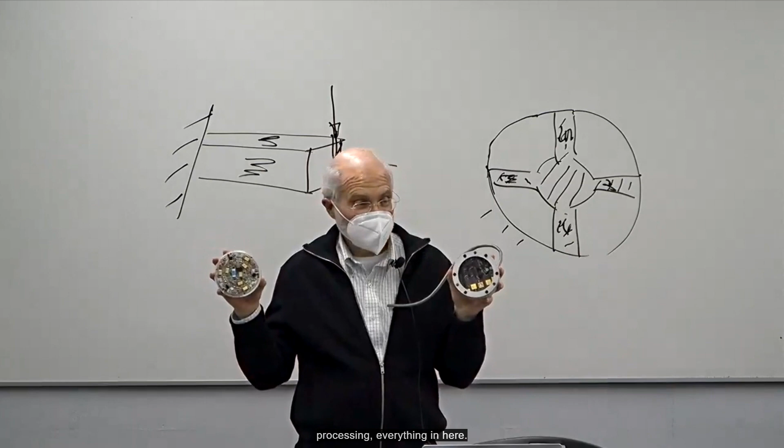I've removed it, but it basically fits in between here. If I left it in here, you wouldn't see what's down in here, but all the electronics for processing everything are in here. Today we use semiconductor strain gauges - it's a whole different world compared to the 80s. Today you need clean rooms to design and build them. But this thing fits in between here and here.

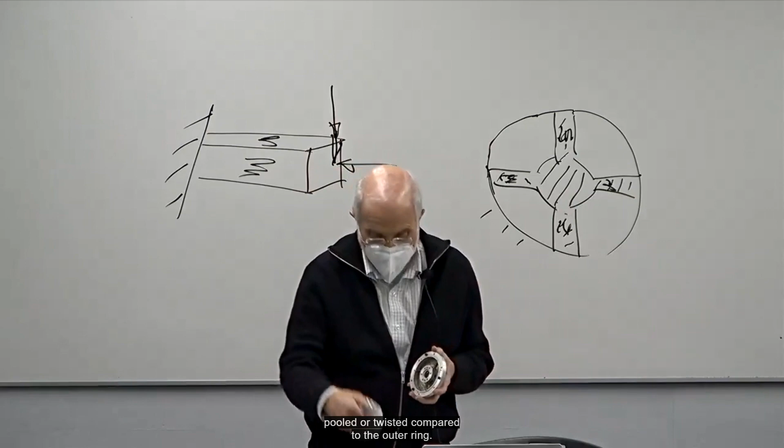What's more important is this outer ring is essentially one end connected to the base, and this inner ring is either pulled or twisted compared to the outer ring. This piece basically attaches to the central core over here, and it pulls or bends and torques, and you can measure all that with this setup. Back in the late 70s, early 80s, this was awesome.

Today we're dealing with totally different technology. I have much more recent load cells, but I don't have them apart. What's nice about this is you can actually look at it, touch it, feel it, and see what's going on. So I'm going to pass this around.

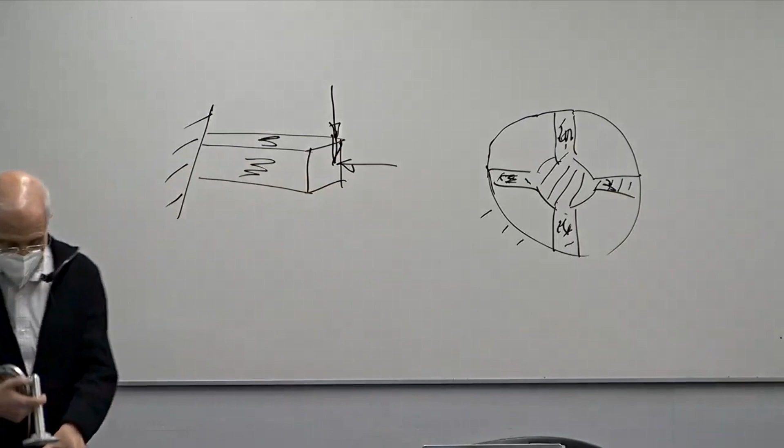I think there's enough time to make it to the few people who are here. So look at it closely.

I'm trying to remember what chapter in the textbook - I think it's chapter 10 - deals with load cells and this force torque kind of analysis. So you can see this. I put this out because I wanted you to see a load cell before I put this on the screen.

In the lab that you're doing right now, lab number 4, there is a load cell. Robotiq makes those load cells - they do a pretty good job, relatively inexpensive. Anyone care to guess how much a good force torque sensor costs?

Are we talking hundreds of dollars, thousands of dollars? I'm not asking for exact numbers. Thousands, absolutely - we're talking thousands of dollars. Why? Because we're talking about very tiny displacements that we're measuring, so you have to have very significant amplification. We have differential amplifiers amplifying these very small changes with very high gains and small displacements. You're often going to pick up all sorts of other signals - your load cell becomes an antenna and will even pick up whatever frequency is in the air, whether you can sense it or not.

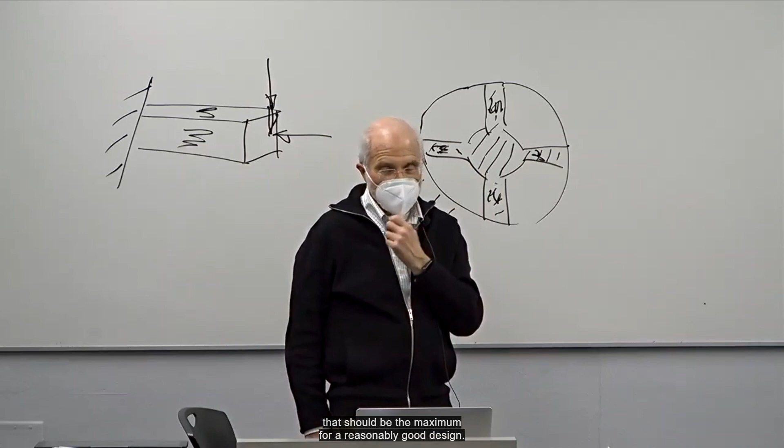So even if there's no Fx, you want to see 0, no matter what Fz is, right? But there is going to be some cross effect, and that cross-coupling effect you want to make sure in a high-quality design is typically under 3%. So if Fx should be 0 and you see 0.03 of Fz on it, that should be the maximum for a reasonably good design. Keep that in mind.

We're going to go - I have a whole bunch of websites we're going to explore. Looking at the time, we're not going to get there today, but we'll take a look at different manufacturers of load cells and what they sell and what you do with these systems, and all sorts of videos, but we won't get to that till next Tuesday.

Today, I only have a few minutes left, so I'm going to do this rather quickly, just to show you the concepts. Here is my load cell, and it has its own coordinate frame, which is UVW. There's small d phi v, d phi w, and d phi u - these are small little rotational displacements about the coordinate frame. Again, this is a sensor. There's a du, which is the small displacement along the u direction, dv are small translational displacements along the v direction, and dw are small displacements in the w direction.

Again, when you buy a load cell, it will tell you exactly which direction is Fz, Fx, and Fy - it'll be marked on the outside of that sensor. So all measurements in that load cell are essentially going to be in terms of the UVW coordinate frame attached to the load cell. But then when I mount that load cell in the wrist, on the flange of the UR5, you can see it over there - take a look at it next time in your lab. It's essentially black, not very colorful, but it is in between. And if I remember correctly, those cost about $4,000 to $5,000 a piece. Today, when you buy a load cell, almost all the processing is inside the load cell itself.

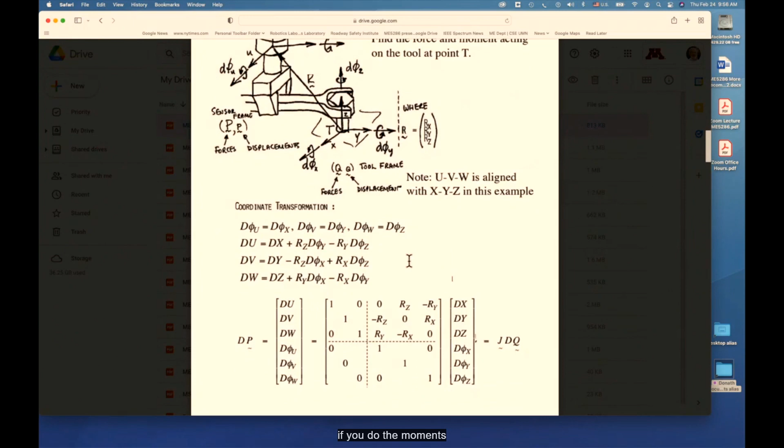If you do the moments, you are going to get this relationship, which turns into this equation. There's du, dv, dw, d phi u, d phi v, d phi w. It's going to be equal to this matrix, which is a 6x6 matrix, times dx, dy, dz, d phi x, d phi y, d phi z. This is a 6x6. This is an identity, a 3x3 identity matrix, all the off diagonals are 0. This is also an identity matrix, a 3x3, all the off diagonals are 0. There's a diagonal of 1 here, and this 3x3 is all zeros.

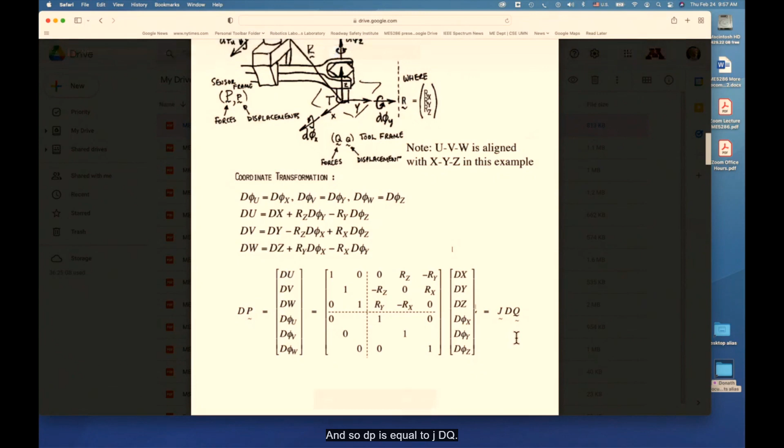And this is the most interesting part of the Jacobian, which multiplies each of these terms. This is the Jacobian. I don't want to go through all the detailed steps, I'm just showing you that this is the relationship between the sensor small displacements, that's the strain in the sensors, and this is the strains at the end effector where the tool is doing its particular job. So dP is equal to J dQ, and next Tuesday we just take the transpose and out pops the relationship we need, and then we're going to take a look at all sorts of applications, different load cells.

You typically don't have to calculate all this, it is often done for you, again, depending. Certainly, the load cells give you, they work out the Jacobian, so you don't need to, but it does not know where the tool is, so then in that case, you have to add your own analysis to come up with what you need. Thank you very much.